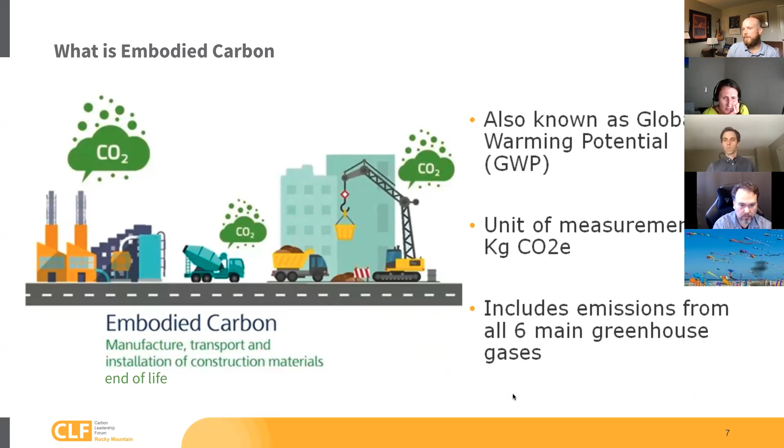But a lot of people think of it in terms of carbon dioxide. Often we're thinking of carbon dioxide equivalent units, and we could go into a lot more detail. But embodied carbon is kind of what unites Carbon Leadership Forum and what we try to focus these presentations on.

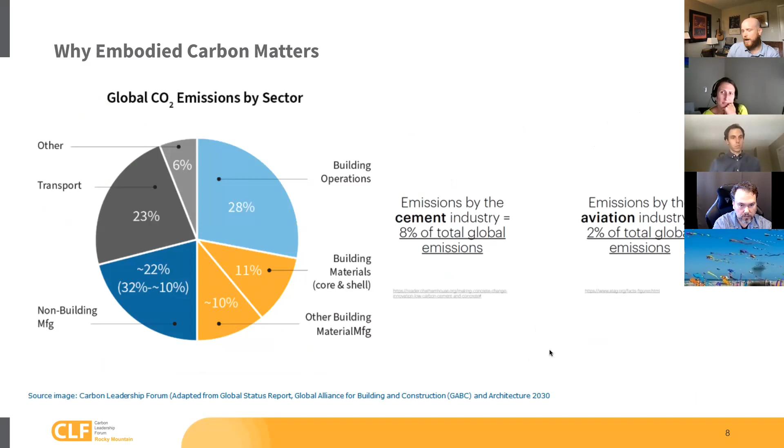So why does embodied carbon matter? A lot of you have seen this a number of times, but the crux of it really is that a very significant amount of our global emissions come from material production and construction. And in the life cycle of a building, actually, embodied carbon can be in the neighborhood of 40% of total emissions.

With that, though, I want to jump to the next aspect, which is just to give Victoria, one of our co-chairs, a brief opportunity to speak about Carbon Leadership Forum, how we're integrating with the national group on policy. Hello, everyone. So very briefly, we have been engaged by the CLF, as Matt just said, the CLF policy group at nation level.

And because many states are already developing policy working groups within their hubs, and they are establishing policy leads, we are looking forward to form that as well with the CLF Rocky Mountain. From previous conversations, we have heard that many of you are interested in these topics, and we're just looking forward to hear from you. Please email us at the CLF Rocky Mountain Gmail account, or individually to either of us, and let us know if you're interested in participating in this policy group.

And then from that, we're gonna need also one policy lead. And Jim Melentine is gonna be attending the first meeting next week, and he will be the one who will coordinate initially with the working group and the policy lead on what the next steps are. But if you are interested, please let us know. We're looking forward to creating this group and working with the state.

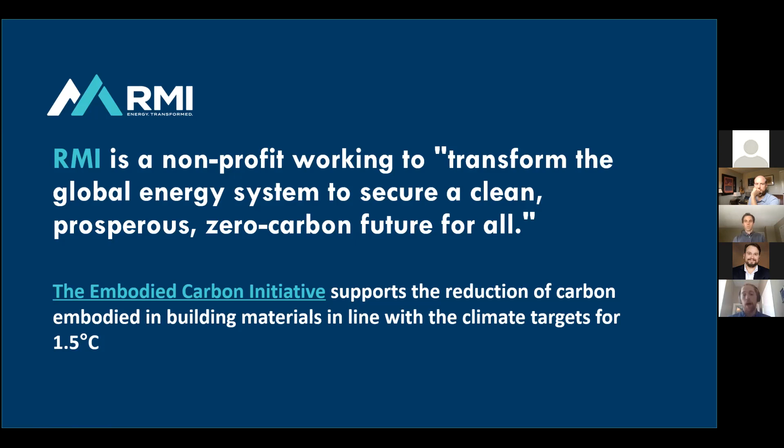So moving into this Concrete Solutions Guide and what we laid out to do. So we focus on 6 actions to lower the embodied carbon in concrete. And it's important to note the kind of time frame that we chose for this. We focused on mostly market-ready solutions that are already being employed. So there are many different innovations coming down the pipeline of using hydrogen as process heat, or really next generation forms of concrete blends and mixes. But our focus was not on that.

There is a sister report, if you will, that was released this week, called The Economics of Embodied Carbon, that focuses on the kind of comparative choices that one would make when trying to lower the embodied carbon in a whole building system, recognizing that just using as much concrete as possible all the time is not always the most direct path to a lower embodied carbon building. However, for this report, we were focusing specifically on concrete. So, big timber fans here as well, but we've been focusing on the concrete supply chain.

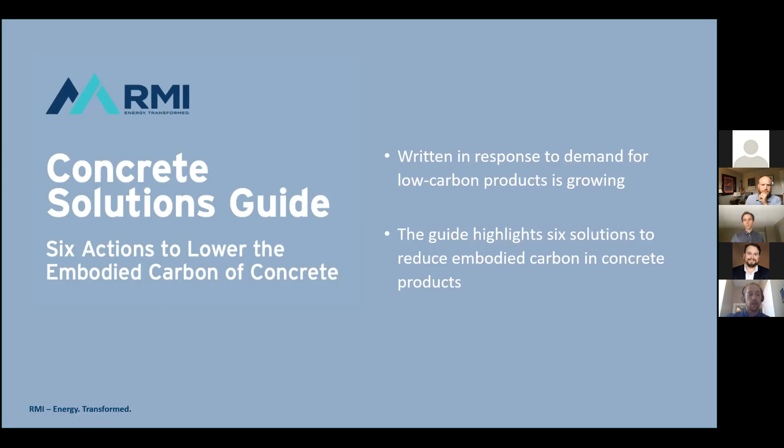And it's been written largely in response to the demand for low carbon products and how that is growing, both in terms of large corporates asking to build more sustainable building campuses for their corporate headquarters, as well as the amount of legislation that we see moving with local buy clean policies, as well as the recent proposed federal buy clean as a part of the ongoing infrastructure negotiations. And so this Concrete Solutions Guide highlights 6 different solutions to reduce the embodied carbon, specifically in concrete products, and runs the gamut between processes and technological innovations, as well as softer interactions in between stakeholders. And to go at a high level over all of the 6 solutions covered in our guide and the stakeholders that we hope to address with it, I'll pass over to my colleague Lachlan.

Yeah, thanks, Charles. So as Charles mentioned, the guide is really focused on near-term solutions. And these are the 6 that we came up with in that focus. The first one is really around performance-oriented specifications, being able to allow folks to innovate in terms of the mixes that they're producing in order to lower the embodied carbon of those concrete mixes.

And the second one is what that often looks like in practical terms, which is using SCMs within those mixes in order to drive down the embodied carbon and basically not use as much cement to produce the same amount of concrete. The third one is really around sensors, which can have benefits on site in terms of saving time, money, and materials. And that obviously also does have an impact on the emissions, but again, mostly as an enabler really to help people innovate or provide the opportunity to innovate in terms of their mixes, but still be able to get information in real time to confirm the performance of the concrete on site.

The fourth one was about embracing circularity, primarily around concrete recycling. So that has a smaller impact on emissions because it's offsetting aggregate, which doesn't represent as much of the emissions in a given volume of concrete. But it has some other benefits, can have cost benefits depending on how and where it's used, and obviously has the main benefit of avoiding a waste stream that would otherwise be a burden.

The fifth one is carbon as a service. It's really focused around a sort of new developing area where CO2 taken from some other source, like a power station or somewhere else, is used either in the mixing or curing of concrete, and therefore sequestered in the concrete itself, offsetting some of the emissions that were associated with the original cement production that went into that concrete.

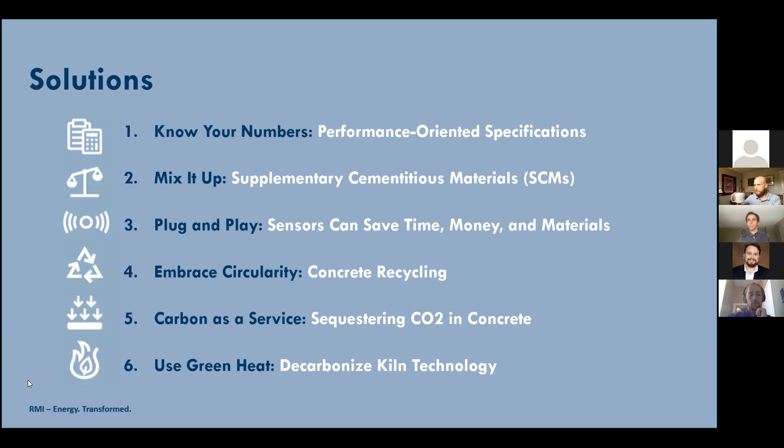So in the guide, just on the next slide, we framed these 6 solutions around the 6 key stakeholders in the concrete supply chain. So unlike some other supply chains, for example, steel, where the emissions are concentrated and there's really only one actor in the supply chain that can make a difference, in concrete, all of the stakeholders in the supply chain have a role to play in reducing the embodied emission in concrete. And so we framed it around these 6 different stakeholders and then linked each of the 6 solutions to which ones are most relevant. So the 6 stakeholders are around concrete producers who have responsibility for lowering embodied carbon, like I said, by innovating in their mixes and deploying SCMs.

The cement manufacturers who have an opportunity both to use those alternative fuel sources as well as producing blended cements, which can also have lower embodied carbon, like PLC. The developers who obviously are controlling the budgets and therefore have a lot of influence in pushing the other stakeholders around. The designers who will set the specifications that eventually lead to actions on the ground. Policymakers who can really have an impact across all of the different solutions, both through the procurement lever and through their policy and building code levers. And finally, the contractors who are obviously tasked with actually bringing all of this to life in a final project.

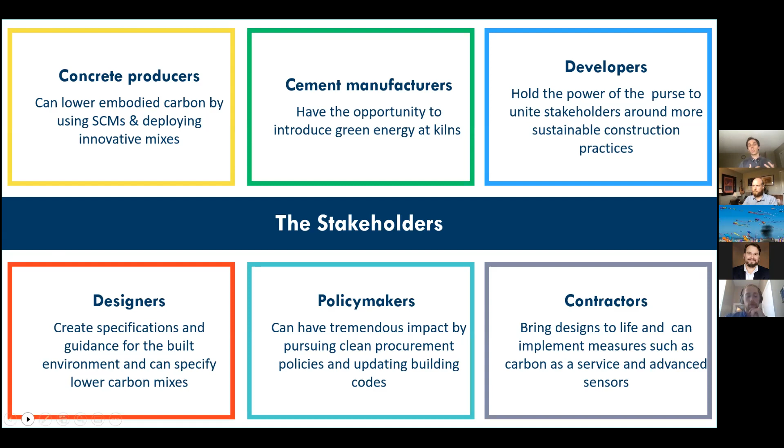So today we've decided to focus the presentation around the solutions we identified as being most applicable for designers. And so with that, I'll hand it over to Charles to take us through the first solution. Thanks, Lachlan. And recognizing there was a lot of information and interactions there, for today, we just chose to take the perspective of a designer and what solutions in this guide they might be most interested in.

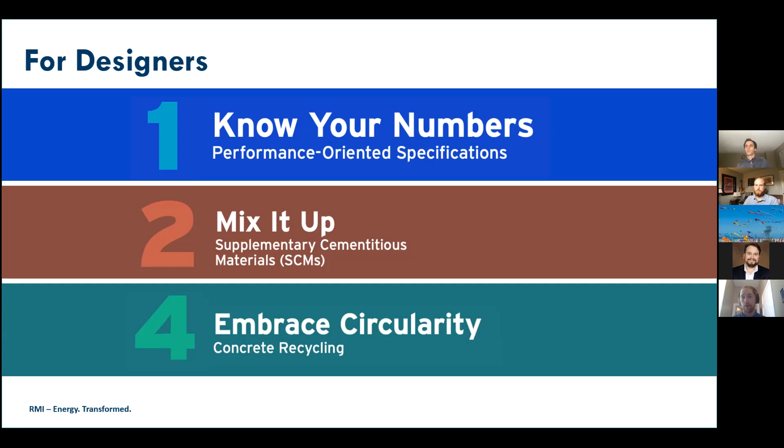And of those 6 that we originally named, we think that performance-oriented specifications, figuring out how design can be specified in a way that is less prescriptive and allows other stakeholders to be creative in how they deliver on the intent of specifications; the use of supplementary cementitious materials as one of our main levers to reduce the cement content and in turn the embodied carbon content in the concrete; and concrete recycling would be of most interest to them.

And so to step through that first solution on performance-oriented specifications, I won't be able to see everyone's screen pop up just because of my screen sharing, but if you've heard of performance-based specifications, you could go ahead and just throw an emoji of your choice up in the bottom Zoom panel.

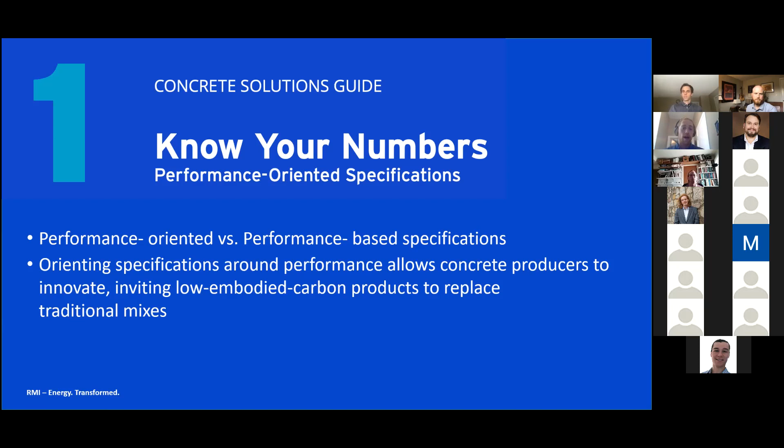And I ask this because performance-based specifications is a relatively well understood term, whereas performance-oriented specifications is a term that we coined mostly for the sake of this report. So performance-based specifications talk about when you lay out a specification, have it be based on the performance, the end goal of the concrete, rather than a specification of what it is made out of.

So saying must be 15% fly ash is a prescriptive specification versus must have a compressive strength of X is a performance-based specification. And over the years, performance-based specifications have kind of caught on to mean only performance specifications. And so we chose the term performance-oriented to step away from this misnomer, that performance-based is not wholly performance specifications, but rather that there is this blend of prescriptive specifications and performance-based specifications.

And that's valuable to note because, when specifying projects, it's important to give deference to the experts in the field who have been working on a particular project in a particular space. So if you were, for example, doing a bridge retrofit and the township had recently worked on the bridge in the last decade, and they had experimented with different concrete blends and realized what didn't work, or that, based on the weather conditions, they want a specific blend, it's perfectly acceptable to have a prescriptive specification on elements of

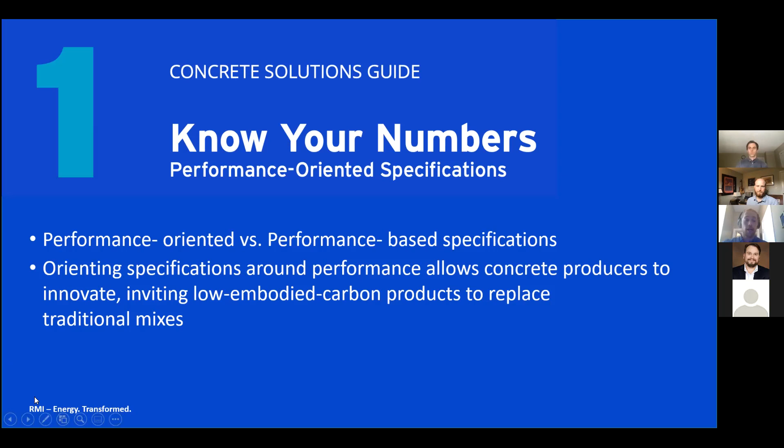Now, there is a question, and I'd be keen to get to this during the discussion period, of what that means for other specifications going forward in Colorado State, or even more local city projects. With this first performance-oriented specification of global warming potential or embodied carbon in place, is that going to pave the way for more performance-oriented specifications to be used in the future? Curious if any of y'all have thoughts about that when we move into the Q&A and discussion section. But for right now, I'll pass to my colleague Lachlan to move through our next two solutions.

Yeah, so the next one we have here is around the use of SCMs, which is often the practical implementation of those performance-oriented specifications, allowing folks involved in the supply chain to innovate by using SCMs in the mix in order to lower the embodied carbon. So in putting together the guide, we had a look at some of the practical constraints around using SCMs. So thinking, for example, in limestone about the limits that ASTM sets out for how much limestone could be used in a mix because of the impact that it might have on strength, as well as some of the supply constraints, particularly focused around fly ash and slag.

And together, looking at those two constraints, we come up with the estimate of around 40% substitution being possible across the US with SCMs. And that in and of itself, because it offsets cement usage, would have the largest impact in terms of emissions of any of the 6 solutions in the guide. So here we're talking about 27 million tons of CO2 per year that could be offset if we could reach that 40% substitution. In order to reach that 40% estimate, we basically used the ASTM limits on limestone, which is 15%. And then both fly ash and slag are supply constraint limited.

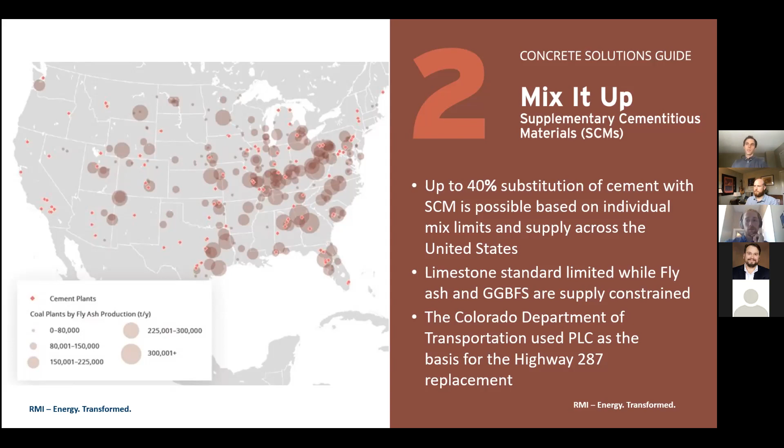And of course, all of these solutions have been around for a while, and that's exemplified in the Colorado example on the slide here around DOT using PLC in their highway replacement projects. But mostly from an emissions perspective, the aim with SCMs is to increase their usage as much as possible.

So on the next slide is the third solution, which is around concrete recycling. So as I mentioned earlier, concrete recycling has a smaller impact in terms of emissions because it's offsetting new aggregate rather than any of the cement, which is where most of the embodied emissions are coming from in a given concrete mix. But it does have some other benefits.

So if it's used on site, it can offer cost benefits. If it's used on the same site where it's produced; often those cost benefits are negated once the material has to be transported any significant distance. And obviously it avoids the waste stream that would otherwise be in place. It is important to note on concrete recycling that from an emissions perspective, it needs to be used in non-structural applications in order to have an emissions benefit.

Because of the variable nature of the material and the size and grading and potential for mortar to be left on the material as well, it can have a negative impact on the strength of a concrete mix. And if that's the case, any additional cement that's used in the mix will offset any benefit associated with the emissions reduction of using recycled concrete because it is relatively small.

And that's been recognized in a number of areas, which is the example on the slide here around the city of San Francisco specifying 15% RCA, but only in pavement applications. And similar to SCMs, this is a relatively mature solution in that there are a number of companies across Colorado that offer recycling services. And it's really about maximizing the amount that it's used in order to drive emissions reductions.

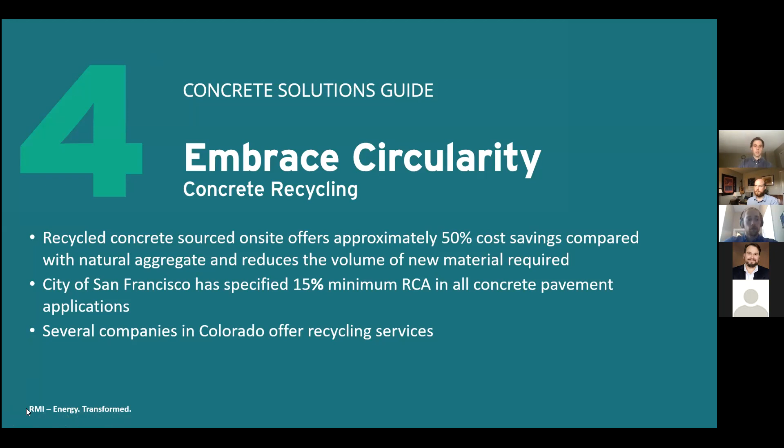Thanks, Lachlan. And so, what we want to underline in this report is that reducing the embodied carbon in concrete is far from an intractable problem. And in fact, opportunities abound for decarbonizing this industry using proven and scalable technologies. And again, Lachlan had mentioned this earlier, but a really unique opportunity here in the concrete sector and indeed in the built environment is a bit of a double-edged sword in that, one, there's a challenge that so many building projects are very specific and with a very specific set of stakeholders.

But the opportunity in each and every project for any of those stakeholders to engage in conversation early, begin a dialogue around the opportunities that exist in many of these proven solutions is sizable. And so it's our hope that by members of the industry engaging with this guide, we'll be able to foster collaboration among stakeholders that will drive adoption of these solutions, but also further innovation for a next generation of lower embodied carbon building solutions out there.